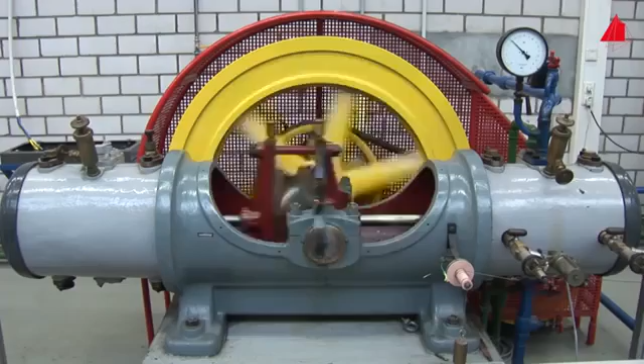The connection rods of this old compressor have endured a large number of rapidly changing tensile and compressive forces. Even when cycling quite moderately in the city, many components are exposed to periodically varying loads without us being aware of it. The crank arms are alternately under load, then swing back almost load-free, are under load again with the rhythm of pedaling. The spokes, the pedals, even the individual links in the chain are stressed periodically.

Also, the railway bridge over the River Rhine, seemingly totally unaffected, alternately has to bear the additional burden of a heavy freight train and then only its own mass. Aircraft experience quite different stresses during take-off and in turbulence than on the ground. This type of loading is generally termed fatigue loading, and the material responds to it with fatigue. The term fatigue is used because it takes some time for the failure to occur under repeated loads.

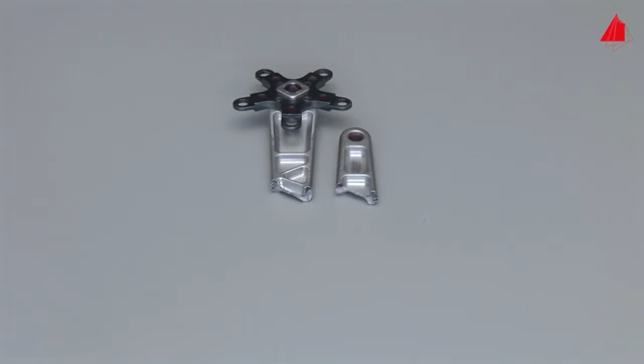The problem with materials is that they normally endure less at repeated loading than with a once-only load. The wire does not break when first bent, but bending it back and forth repeatedly leads to an early fracture. This bicycle crank arm had only been able to endure the cyclic loading for a certain time before it broke. The fate of the garage door spring was the same. It had borne the opening and closing of the garage door about 60,000 times before it finally fractured.

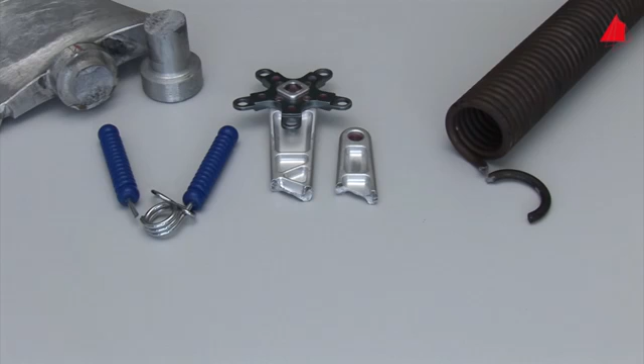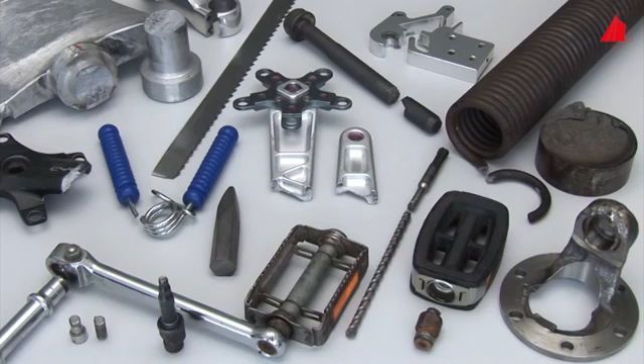The broken exercise equipment, a torn blade of a fan, a bandsaw blade full of cracks, the broken screw, a defective universal joint, and many other examples show how important this phenomenon is. Each day thousands of items break due to cyclic, often repeated loading. How can we make sure that all these components withstand the cyclic loads? To achieve this, one has to test the materials appropriately. We intend to measure the fatigue strength of a frequently used steel in our laboratory.

Hot-rolled steel rods made from the structural steel S235JR are used as base material. In order to eliminate the influence of the surface and to stress the material in a well-defined manner, suitable specimens have to be machined from the rods. This specimen type would be ideal. The shoulder-shaped ends have been designed for safe gripping. The actually tested region is cylindrical with a diameter of 6 mm.

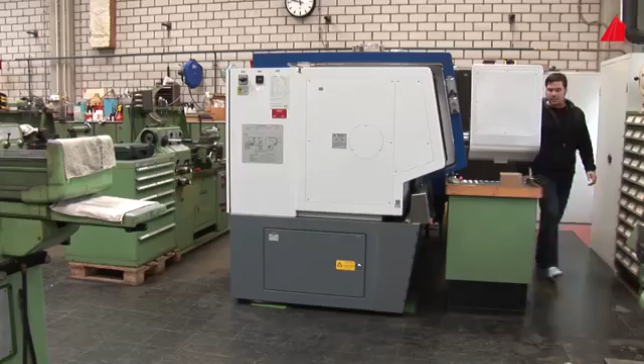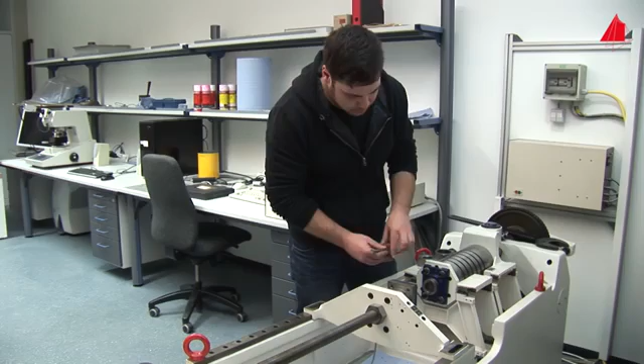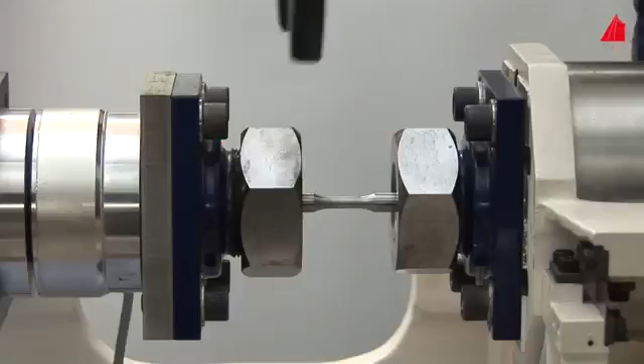The material tester goes to the workshop to get 10 specimens manufactured from the rods, not just one. All of the specimens are as identical as possible. Back in the lab, he has all specimens ready for use and picks out the first one. He mounts the specimen carefully and securely into the fatigue testing machine. Together with two half shells, he inserts one end of the specimen into the right specimen grip. With a union nut, he locks the right end of the specimen. Likewise, he mounts the left end of the specimen into the left specimen grip and tightens the nuts.

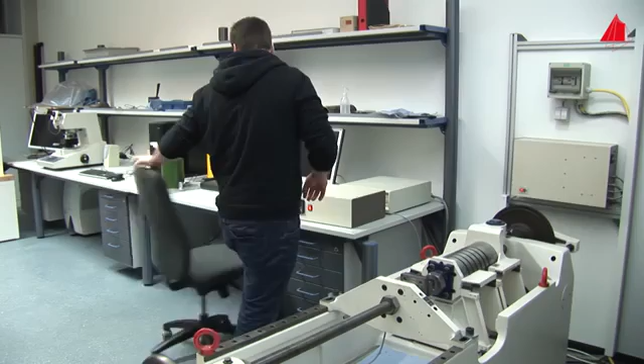The preparation is now complete. The material tester then selects the appropriate test parameters on the control computer. He intends to load the first specimen alternately with a tensile force of 7 kN and a compressive force of 7 kN. The mean force is 0. A click on the start button and the testing machine begins to stress the specimen periodically.

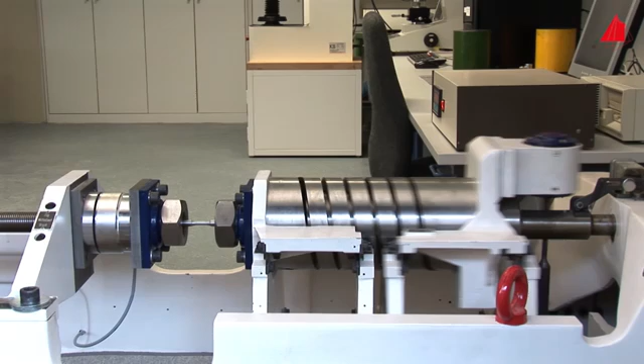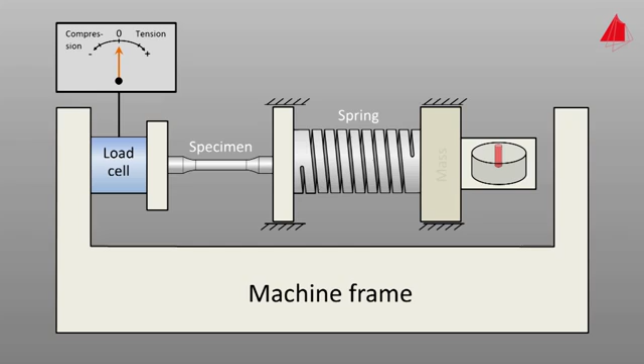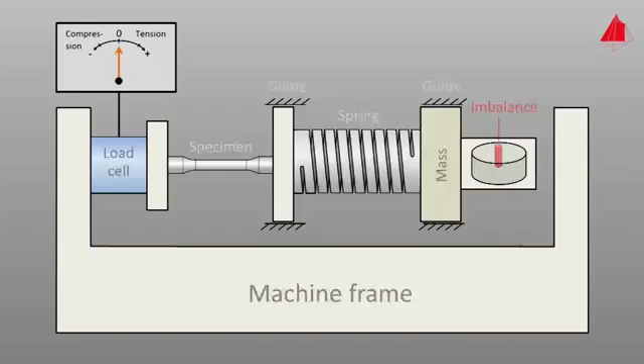Our fatigue testing machine is equipped with a mechanical resonance drive. The specimen is connected at its left grip via a load cell to the machine frame. At the right grip, a spring is mounted, and there in turn a mass. An imbalance stimulates the mass to vibrate. Longitudinal guides prevent the mass from vibrating in the transverse direction. Via the spring, the test force acts on the specimen. By varying the excitation frequency of the imbalance, the test force can be controlled. In our case, the specimen is loaded with about 25 cycles per second.

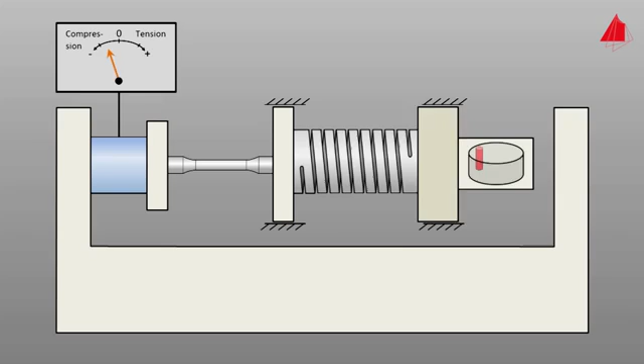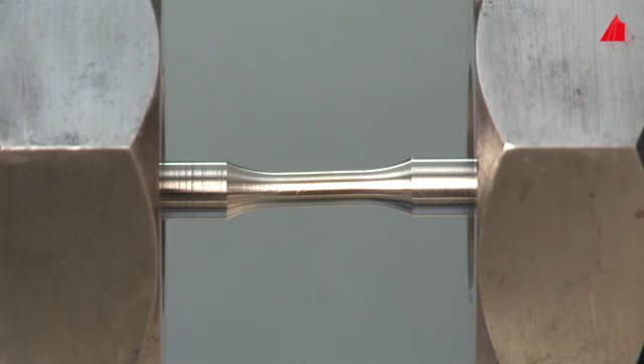Meanwhile, the first specimen has already endured over 300,000 load cycles and still seems to be intact. In reality, however, several cracks have already developed starting from the surface, the so-called fatigue cracks. With each load cycle, they grow a bit further into the specimen. The biggest crack gains the upper hand, grows the fastest, and finally leads to fracture after 381,000 load cycles. The first test is finished.

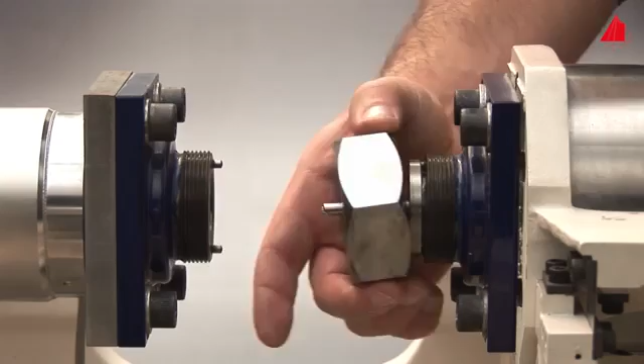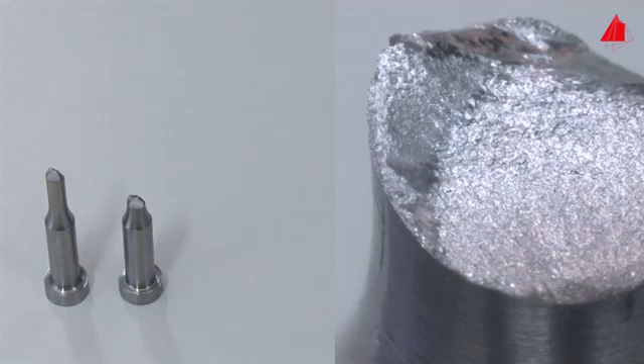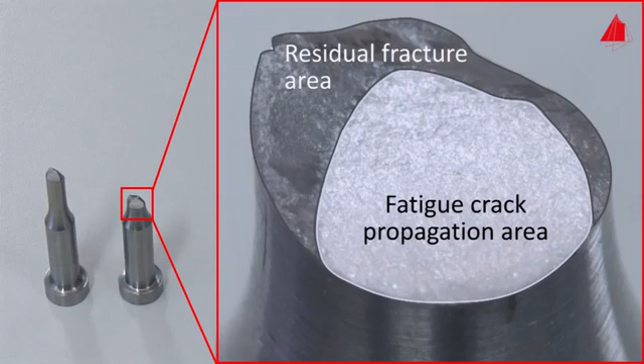The material tester removes the fragments cautiously and inspects the fracture surfaces. At first glance, the fracture surface looks unimpressive. A closer look reveals two regions: the rather dull, predominantly flat fatigue crack propagation area and the rough residual fracture area. The residual fracture area results from the final catastrophic rupture. The fatigue crack propagation area has developed during the cyclic growth of the fatigue cracks starting at the surface of the specimen. What does the fatigue crack propagation area look like at higher magnification?

Of course, now we want to know how many load cycles this material can endure with other loads. For this purpose, the material tester picks the next specimen from his supply and installs it into the fatigue testing machine. He chooses a higher alternating load for the second specimen, a tensile force of 7.5 kilonewtons and a compressive force of 7.5 kilonewtons. Under the increased load, the specimen is only able to withstand 43,600 cycles to failure. The third specimen is only tested with a cyclic load of 6.5 kilonewtons. Under this reduced load, it does not break even after 3 million load cycles.

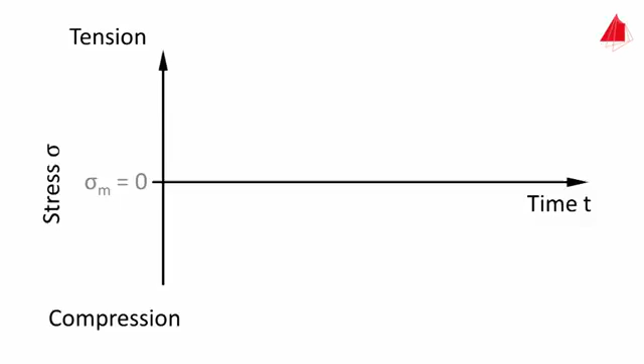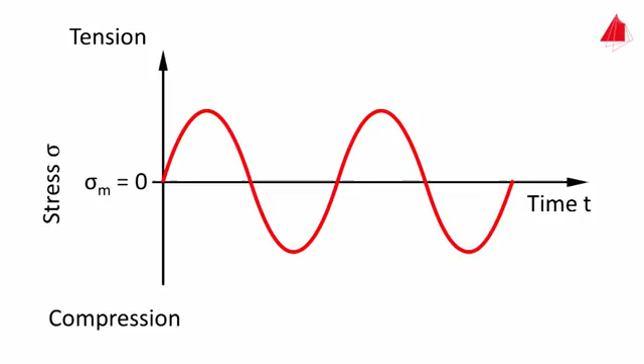Additional specimens complete the series of measurements. Some of the specimens are tested with the same load we've already used. In this way, we get an impression of the range of scattering. To compare materials in a fair way, the different cyclic loads are converted to the respective stresses acting in the specimen. In this case, the stress alternates sinusoidally around the mean value, which is termed mean stress sigma m. In this series of tests, the mean stress is 0. The stress amplitude is labeled with the symbol sigma a.

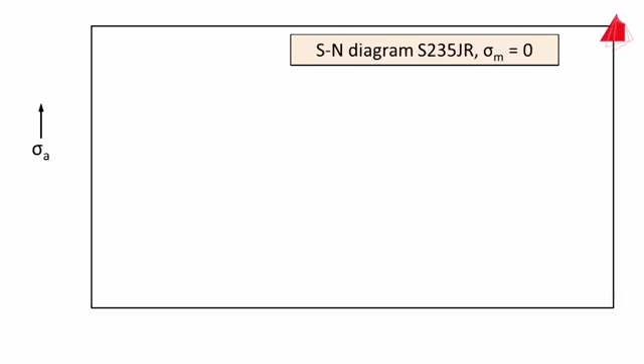For graphical representation, the SN diagram is used, also termed Wöhler diagram. In an unusual manner, the predetermined variable is plotted upwards on the y-axis. It is the stress amplitude sigma a. And the result of the test, the number of cycles to failure N, is plotted to the right on the x-axis. To fit small and large numbers into the diagram, the x-axis is not scaled linearly, but logarithmically.

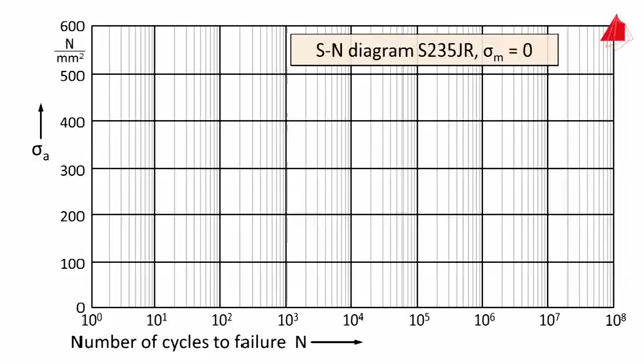The first specimen was loaded with 7 kilonewtons. This corresponds to a stress amplitude of 248 newtons per square millimeter. Under this stress amplitude, it broke after 381,000 load cycles. The second specimen was loaded with 7.5 kilonewtons. This corresponds to a stress amplitude of 265 newtons per square millimeter. Under this stress amplitude, it broke after 43,600 load cycles. And these are the results of the other specimens which have been tested by us.

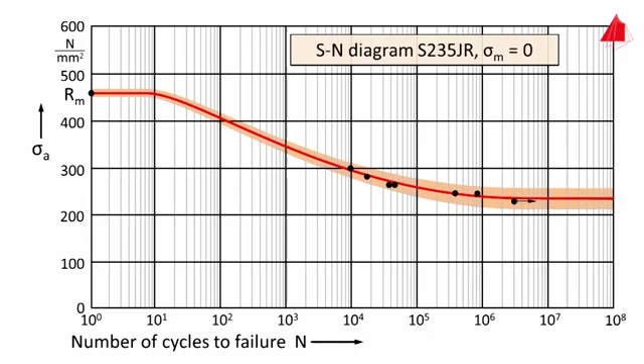When additional specimens are tested and the results are displayed as a curve, it becomes clear that this material will not break below a certain level of stress amplitude, even after a very large number of cycles. This stress level is termed fatigue limit sigma capital A. For most steels with body-centered cubic structure, the fatigue limit is reached after 10 million load cycles at the latest. It must be noted that the experimental results scatter considerably. Therefore, instead of a sharp curve, a statistically defined scatter band is commonly used.

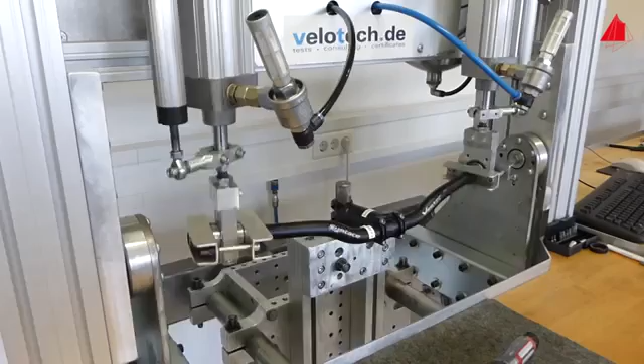Of course, most users don't load their components with a constant cyclic load, but rather in an irregular manner. Therefore, these components have to be tested under this type of loading, termed operational loading. In this test rig, critical bicycle components are loaded similarly to practical use. Stem and handlebar must endure the typical bending and torsional loads for a sufficient number of cycles. Only then are they approved for serial production. Moreover, the fatigue strength does not only depend on the material. The mean stress has an important influence, the shape, the surface quality, environmental conditions and much more. Not an easy story.